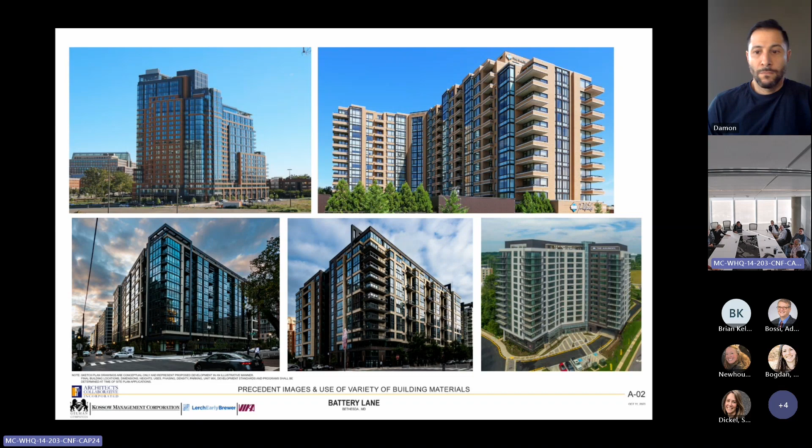Next one, please. We had comments relating to the site plan - the building footprint and its relation to various adjacencies. Within that, there were some landscape comments. Our landscape architect has also done a lot of work. He may not get a chance to go into detail today unless you have a question, and then he will help me cover that area.

Previously the driveway or drop-off area was larger, so we reduced the size of that. Hopefully it still allows reasonable circulation and a few spots to park in front of the building while you run in and get a guest pass, or for a quick delivery. It's integrated into the landscape and graphics, and we'll keep advancing that treatment in the next phase, better than what it was previously.

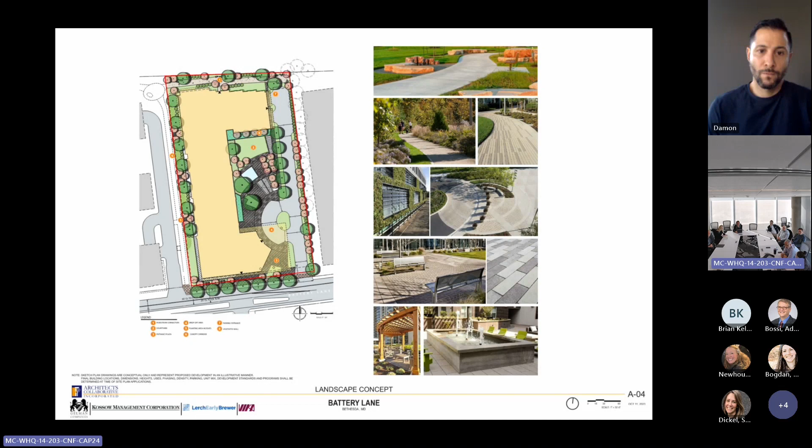Next one, please. These are some of the landscape drawings, showing what Josh and we have in mind for the plaza treatments and potential finishes and visuals. Next one, please. There's really not much to report here.

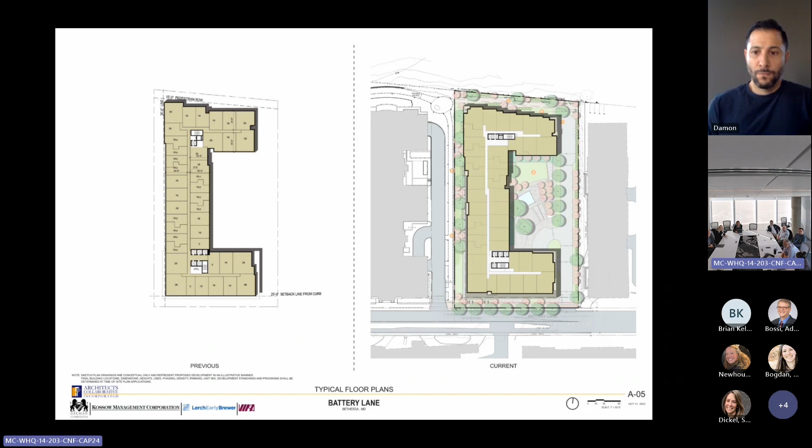There are minor internal modifications to comply with the massing and elevation changes we did. Typical floor plan - there's nothing really major to discuss.

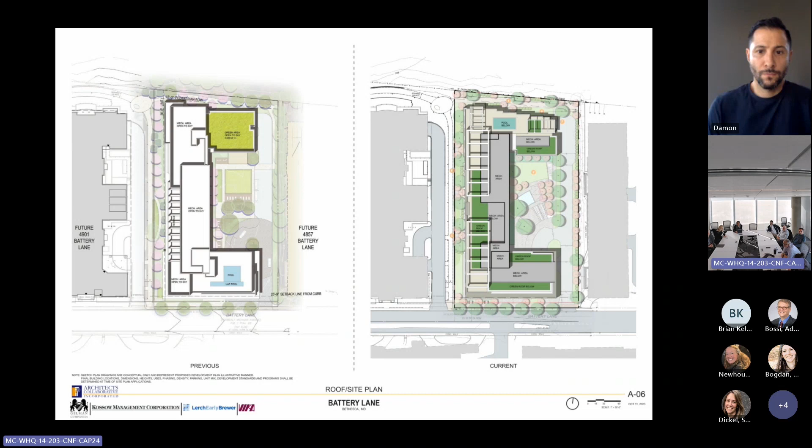The roof plan has changed quite a bit because we've made major revisions to the massing of the west elevation facing the building to our west, which was also one of the comments, and embellished the building's edge along the pedestrian path connecting north-south.

We've also relocated the pool from the battery lane side to the NIH side, which allowed us more latitude in terms of having more open recreation space on the rooftop of the building. Those are the major changes. Next one, please.

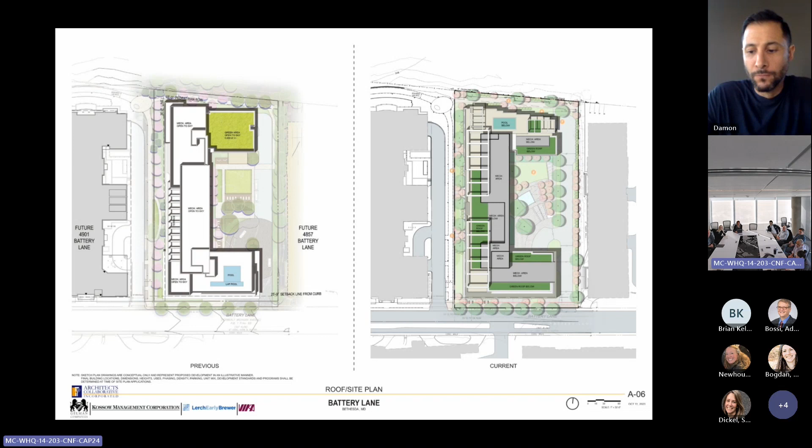It's important to keep in mind that the NIH property is wide open. We can look at a Google image if need be, but to our north there's kind of an urban jungle, meaning it has a lot of low growth and older trees that may or may not be in fantastic shape. We'll be clearing the portion within our property as much as we can, but the rest will have to be done by NIH.

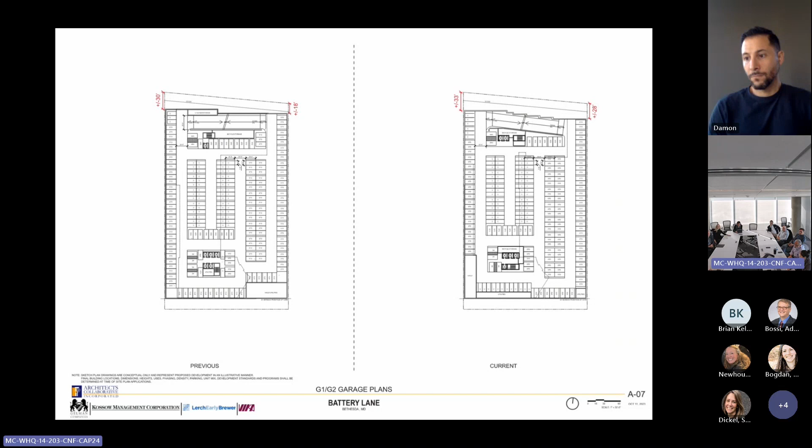And we do have some renderings for you in that area. Next one, please.

I wanted to show a comparative presentation. The left side is what was submitted or presented at the first DAP meeting, and the right side indicates the changes. For me, the most important part of this building at this point for discussion - every part is important otherwise - is the front elevation, the massing, and how we're treating the streetscape. I have more information relating to that.

We did change the setbacks. We had some re-entrant elements and we eliminated a good bit of it. There's not as much in and out above the sixth floor. The guidelines recommend that the base elements and the step-backs happen within the first 60 feet.

The adjacent buildings have a baseline at 30 feet, and that was one of the comments to us, to sort of emphasize that relationship more. I believe we did a lot of work. Hopefully you will like it and agree with us.

My intent has been to create a really nice building, something that has an edge, brings something new, and just as importantly, is buildable, and still complies with these guidelines and really is a good neighbor and a good addition to the public space.

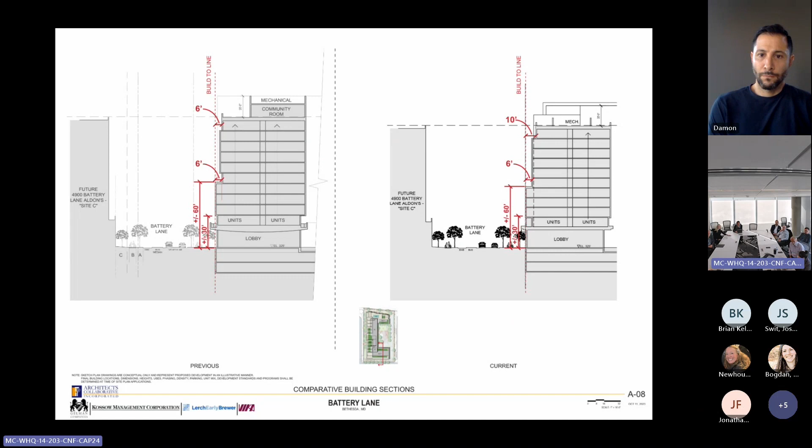Moving on, next one please. I'm not going to dwell on this too much because it's one of the requirements, but you've seen it, you have it in the package that you received. It is an important drawing, but I'm not going to dwell too much. It shows the development of the ideas and thoughts.

The building to our west has a very symmetrical expression. It has two ends and a kind of retracted middle. At a different level of understanding, we wanted to be sympathetic to that, so we have an inner element that is also symmetrical, represented by these prominent columnar pieces that culminate in the trellis at the rooftop. Then we've layered a number of different elements on it and scaling pieces to really develop a major elevation here.

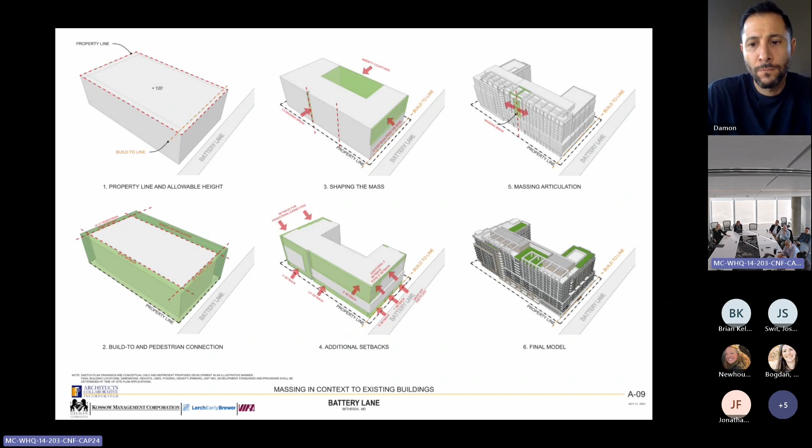Next one, please. You can see again the adjacencies and the relationships here from a bird's eye view. The previous submittal on the left, the current building design that we would like to proceed with on the right.

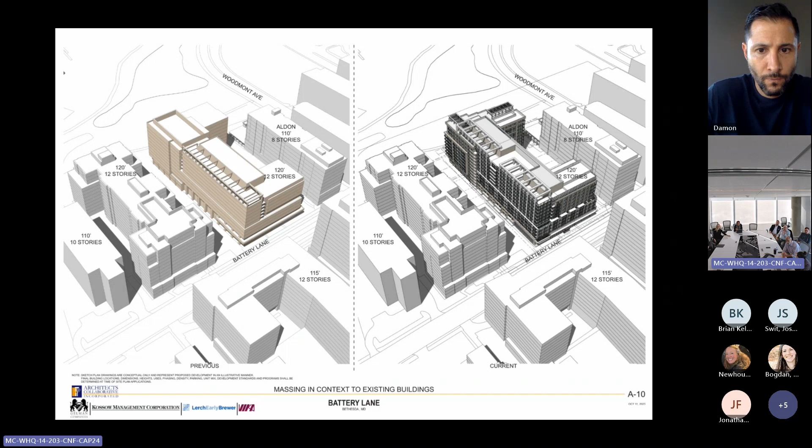You see different views of that. Can you go back just for a second? Sorry.

What's important here is that we will get back to again, is that you can see the scattered, zigzagging elevation or the sawtooth massing we presented to the NIH side.

One of the elements which may not be obvious here because it's a secondary gesture is we realized, looking at the overview, that if you're familiar with Woodmont Avenue as it curves and goes to Rockville Pike, there is a kind of prominent view looking through this back corridor. So we added an element to acknowledge that on the east side of our building—a vertical element that reaches to a rooftop, a secondary trellis. It so happens that the building to our east also steps back here, so we have a nice corridor and a secondary focal point as one is driving in that direction.

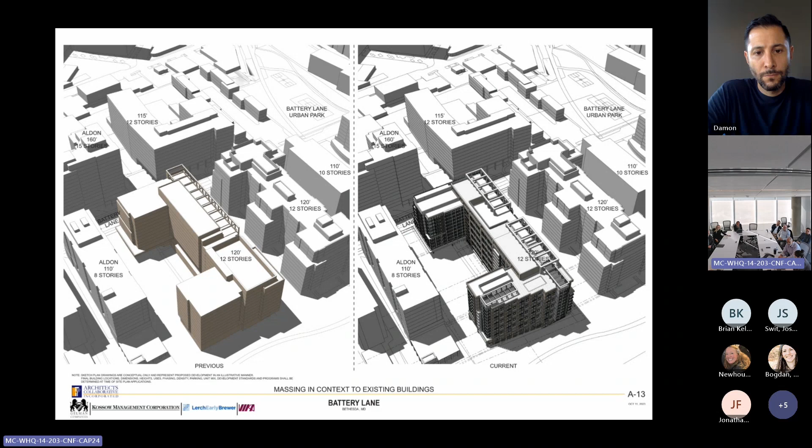It is there. So anyway, you can start seeing more what the building is going to look like and the feeling that we're trying to create.

And the importance of this drawing for me is we tried to capture the growth on the NIH side, albeit it looks a lot cleaner here than in reality. Hopefully it will be cleared out. But we do have quite a bit of space between us and NIH and the line of trees, and I believe, aside from being the northern side of the building, it will still be a pleasant path.

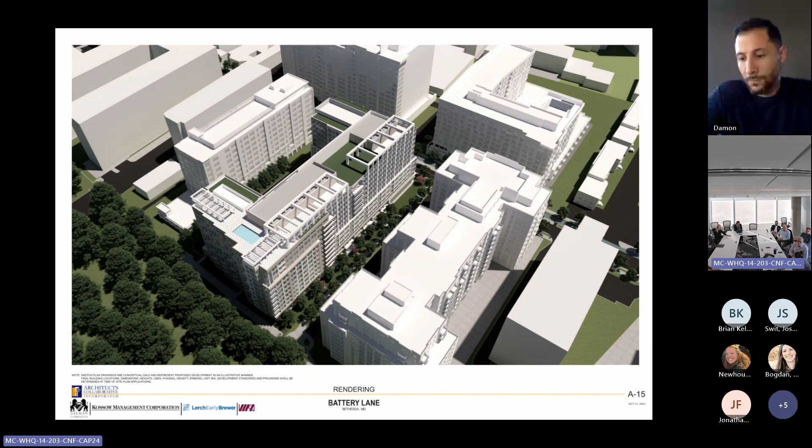Another view of the path and the space between the building and the building to our west. Next one, please.

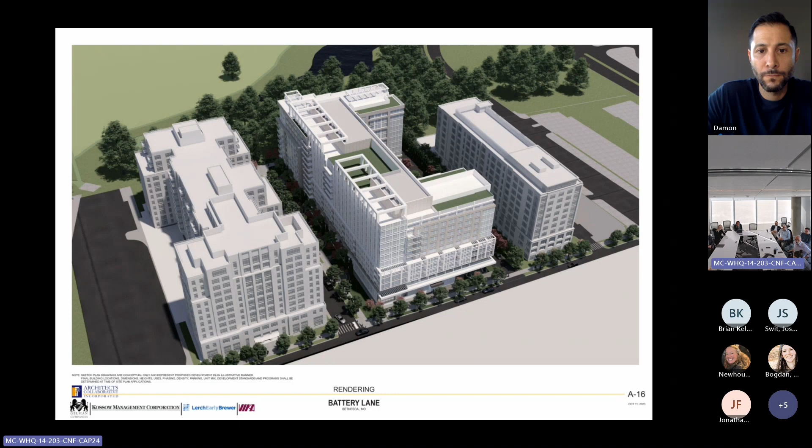This bird's eye view renders what I was describing about our western elevation treatment and intention, combining this with the rooftop, flipping the swimming pool to the northern side since on the rooftop it's really irrelevant north-south. This allowed us to join the trellis with the recreation space. I'm excited about it - it gives us an opportunity to provide good lighting and create a fantastic recreation space on the rooftop, adding to the attraction of the building.

Next one, please. So comparing the previous submittal to the current submittal, what you received in the last package, not the supplemental package - I'm trying to keep it clear. There are three things going on here, and you're only looking at the first two.

One of the issues on the front elevation, aside from the scaling element - the 30-foot baseline, 60-foot, 30-foot expression - is the southwest corner of the building where you see the trellis. Our building in the second presentation was recessed following that vertical element and what appeared to be a wall. This was a misrepresentation as well as a bit of a misunderstanding on my part, and we don't intend to do this. I'll show you what we intend to do - we've basically completely changed that corner.

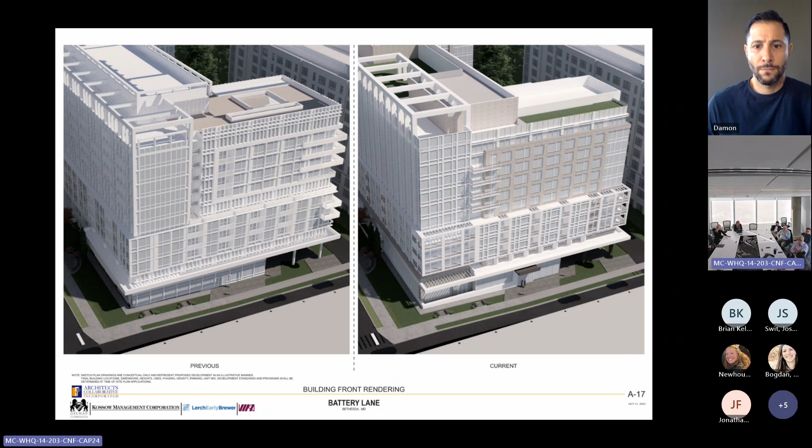There's some grading happening which is actually higher, but the site is rendered as flat, so the white wall you're seeing isn't really obstructed by the actual grading - we've clarified this in further drawings. We do agree with staff's comment and the board's comment; we don't want to present any kind of patio space or whatever. It's a misunderstanding, my mistake. Next one, please.

So you can see the changes from the previous to the new one. We've articulated a lot more on this elevation. It was also suggested that we resolve this elevation - there was too much repetition. We agreed, but that was the length and extent of the development at the time. Hope you agree, we brought more richness to the side. These colors are more abstract, we're dealing with lighter color, we're still working with modeling. Obviously when the reality of the materials are brought in, the next level of study, it will be an even more compelling rendering and building in reality, hopefully. Next one, please.

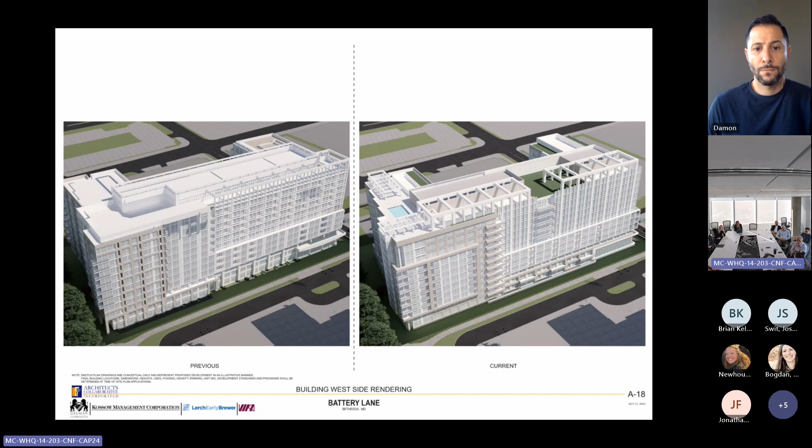I wanted to talk about this elevation that I mentioned a number of times. What's important is on the ground plane, we have widened the path by about 10 feet on the eastern side, another 3 feet on the western corner, widened the path, and also cut the building back parallel to the property line. We've introduced more residential elements and a bit more dynamic geometry rather than surface architecture. And then we've created a 30-foot base here again, which was suggested by staff and we agreed with that, so the building base is more continuous and more prominent on the side as well. Next one, please.

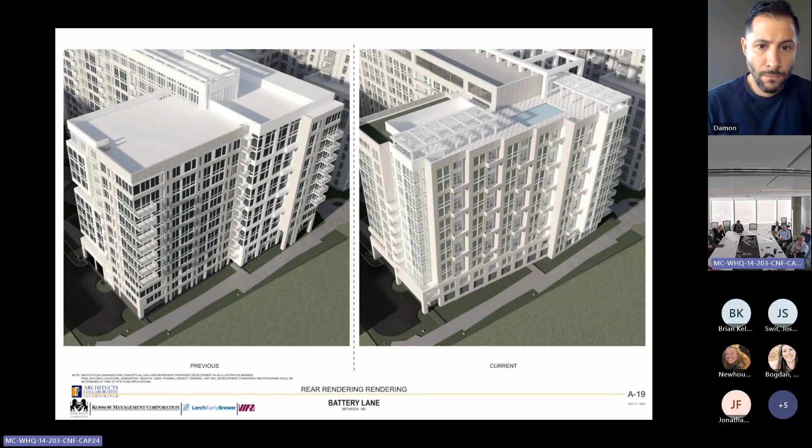This is a comparison now with the second submittal, which you just saw in the previous drawing, versus where I am today. I'm going to stand up so I can point to certain things here. We had a very prominent cantilever, which we felt was the essence of this building concept, and the boldness - for us at least, a new architectural treatment. I certainly don't want to lose that, but there were some things interfering, which was there's still an overweight, too prominent a canopy, which drew way too much attention to that portion of the building and stopped the eye.

So listening to the recommendations - by the way, this is just a reference line so you can see the height relationship with the adjacent buildings, approximately 30 feet, 3 stories roughly. I'm assuming they have a 2-story space - we have a completely 2-story space, which is our lobby entrance, with some seating areas within that lobby.

So in order to bring more prominence to this line, we widened the span away from this thinner band, and then we added an additional line almost in a classical treatment to bring a little bit more interest and importance. We eliminated that heavy canopy at this level.

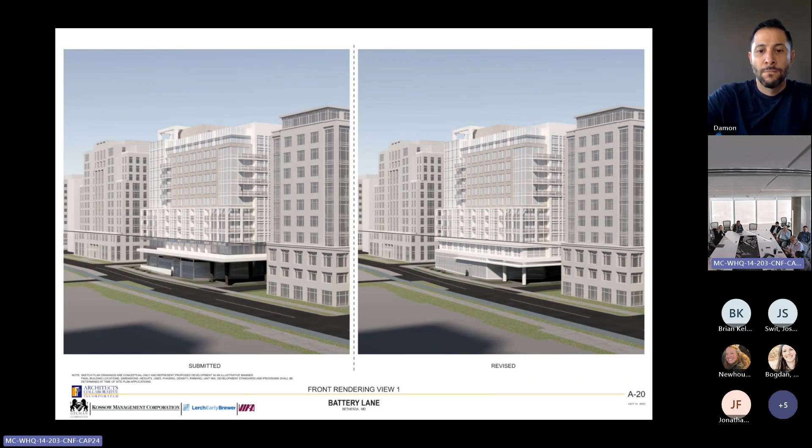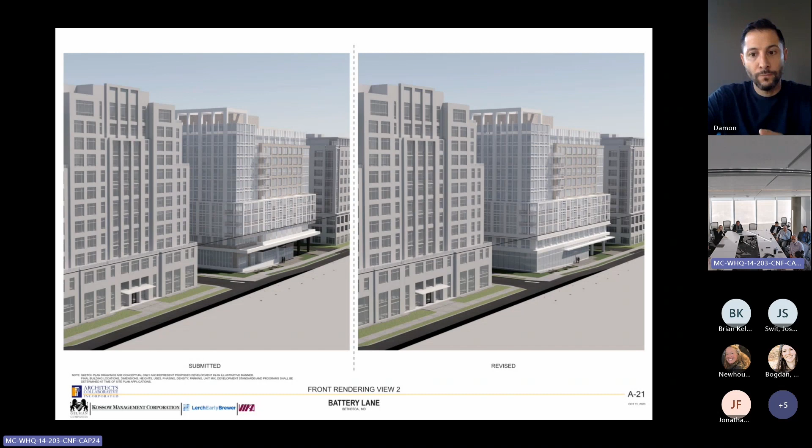Next one, please. This is a view of the same things I described, looking east. Again, the black line is for reference only. Just more context you can see.

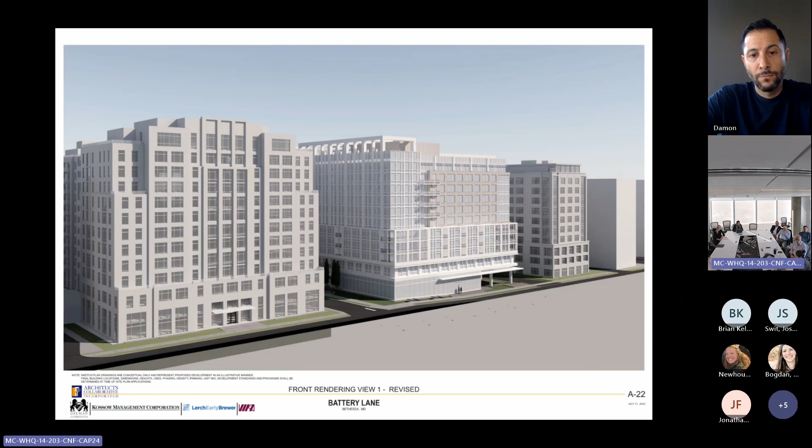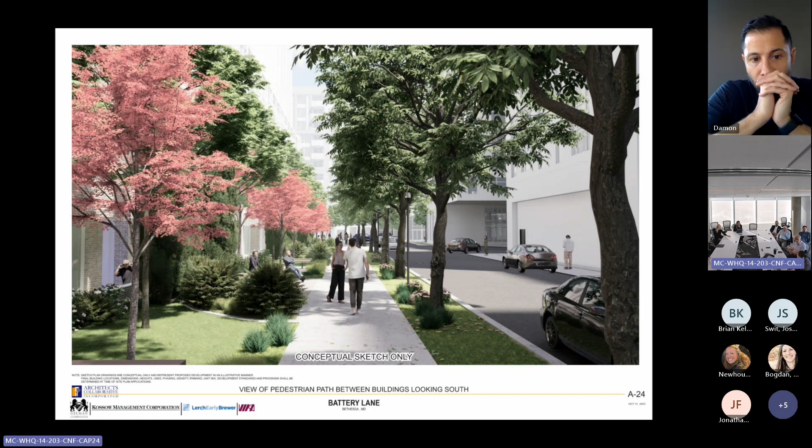This is one of the sketches and renderings we presented. This is the space on the west, the path on the western side of the building, and we're on the left. Obviously that's where the colored trees are because we control that, and Josh can address that path. He's done a lot of work here, embellished the landscaping, and I think it's a pretty realistic, spatial space. Obviously the trees and colors are some other abstractions.

Just have one question: in the supplemental that you all shared, there was a north-south connection that looked different from this view. Yeah, it's the opposite direction, looking the opposite way. I'm just going to show this—I think it shows the north-south connection in a better light.

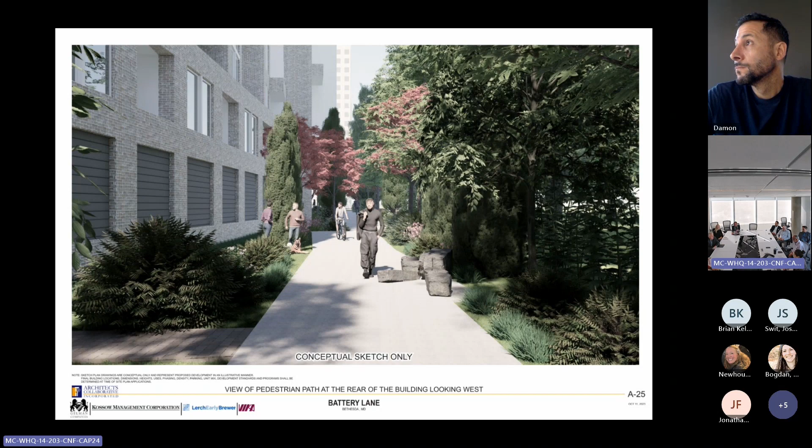Also, I'm curious about the supplement you submitted later—can we talk about that now as well? You haven't shown it yet, have you? No, because I was showing you the most advanced one. Frankly, I didn't want to take up too much time. But we have the original DAP presentation, the supplemental presentation, and then this comparative presentation. So what would you like to see? The supplement, okay.

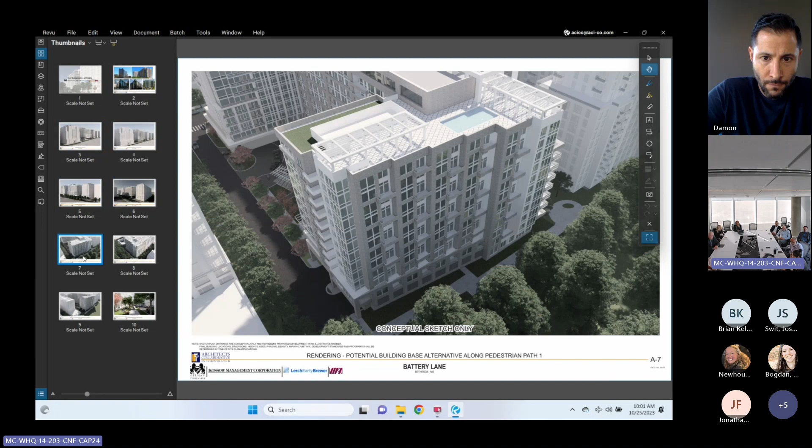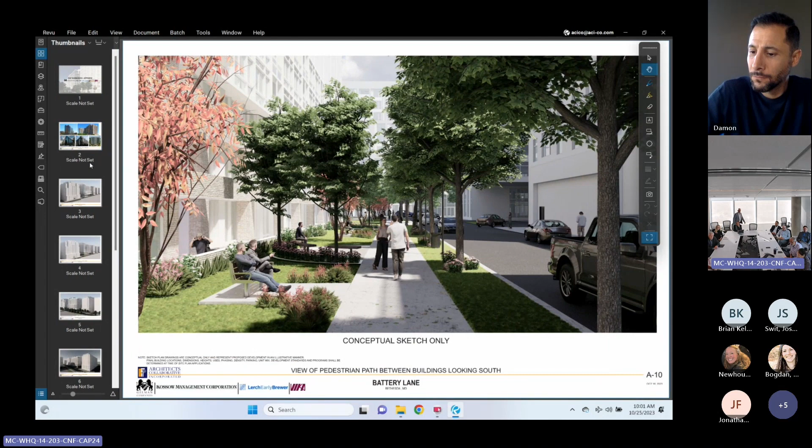So is this the package that you want to see? Yeah, you can go through it quickly. That's the supplemental. Jayu is moving through it very quickly, but should we run back and forth or? Street view, the battery lane view. This one?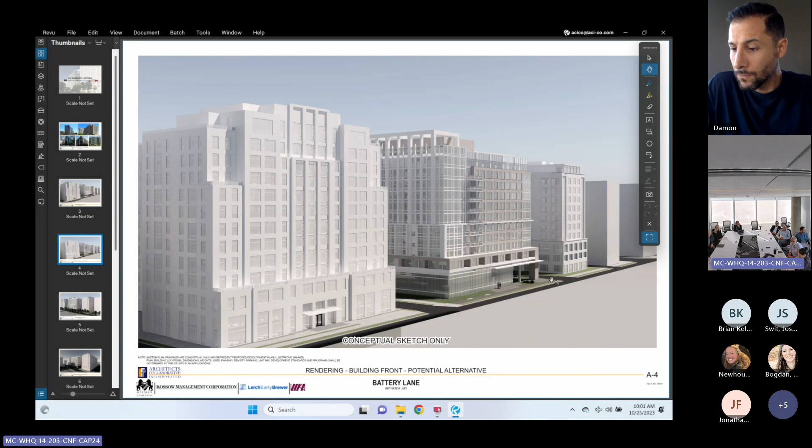Is there other views? Yes. There's glare on the screen right now. Oh, yeah, I thought it was just me. We did this very quickly. We had last minute comments and we tried so hard to respond to them.

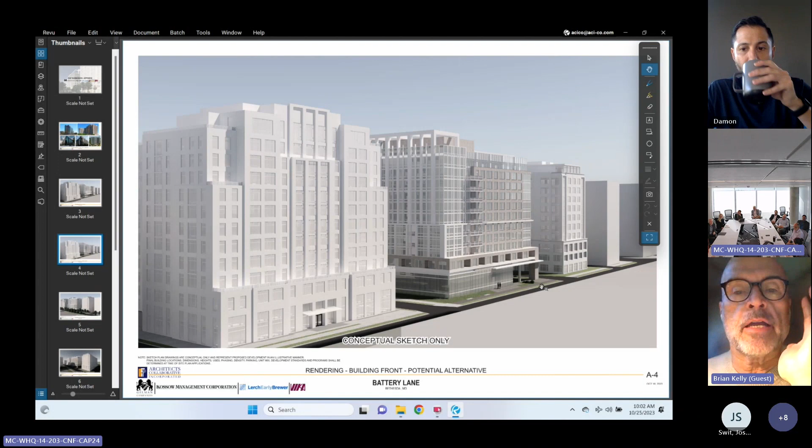This was a quick attempt on my part to show you—with all these different documents, which of these are we being asked to assess? Because I see some that say revise, some say potential alternative. Good question, I'm confused as to which one is on the table. The last one I presented, the one I finished just now.

So not this one we're looking at right now? No, this was a supplemental package we did very quickly. I'm finding it—this, right. So we should ignore the supplemental package? Yeah, this aspect of it. There are a lot of other drawings in there.

So what was the intent of submitting these images? We responded very quickly—I really wanted to show what happens if I eliminate the front cantilever and try a three-story base. It basically deleted the architectural concept of the building. If you can quickly click back—so this was just an exercise to show what would happen, not necessarily what you're asking for. I didn't have a chance to do this work properly, that's what I'm saying.

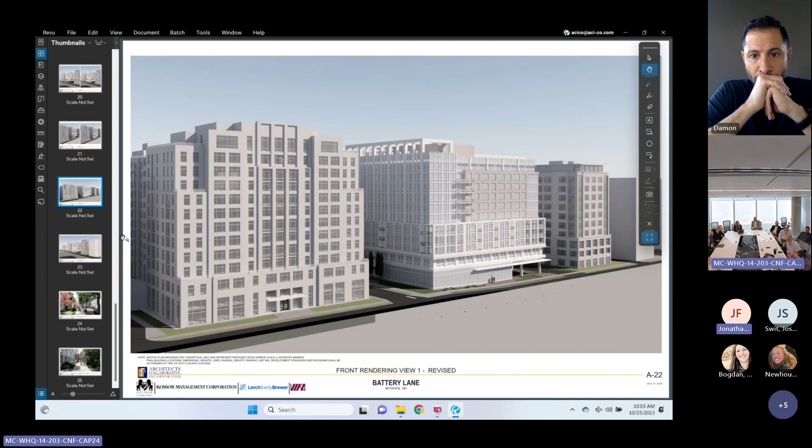Could you make it clear which is your preferred alternative that you'd like our comment on? This is the one you're looking at. You can try another view, this view—we have a number of them.

This is the material in the presentation.

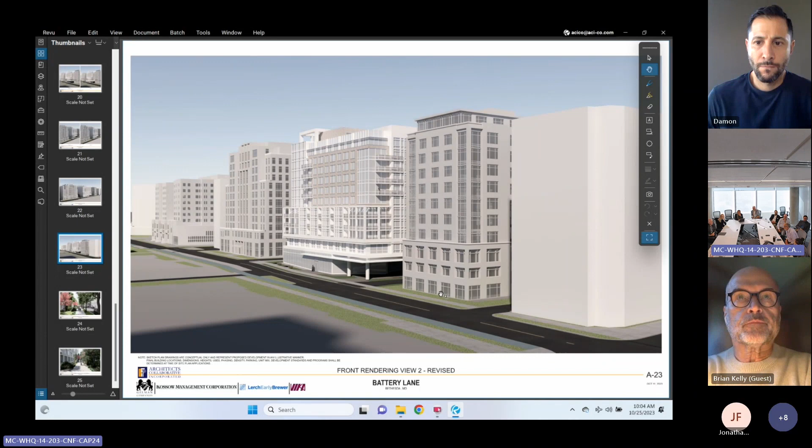My reaction to this one was the base seems much too high. Your supplemental one began an attempt to bring it down, which felt like a better move to me, but still needed refinement. That was my reaction. I hear you, I appreciate that, but it just needs a lot of work.

I thought about it quite a bit between then and now. I'm trying to hang on to this architectural concept, as I mentioned to you, of this building projection that is different proportions, yet it's still within the 60 feet baseline, etc.

I guess you have two neighbors that have established this 30-foot high kind of base, but they are not yet built. I assume they're going to be built, aren't they? I have no idea, well, they've been entitled. The building to the west does have site plan approval, the building to the east does not, so that one is still sketch plan. It's part of Battery District.

One of the merits here, I think, is the top of the building. I think you've devised a way for the building massing to meet the sky gracefully.

More important to me from an urbanistic standpoint, particularly a street like Battery Lane, is how the building meets the ground. I sort of feel like somebody's hiked the trousers up so that the belt line is someplace around just below the chest, a little higher than it really needs to be. The 30-foot height of the adjacent building seems to me to be a datum that you'd want to somehow respect, and it seems to be kind of confused by that.

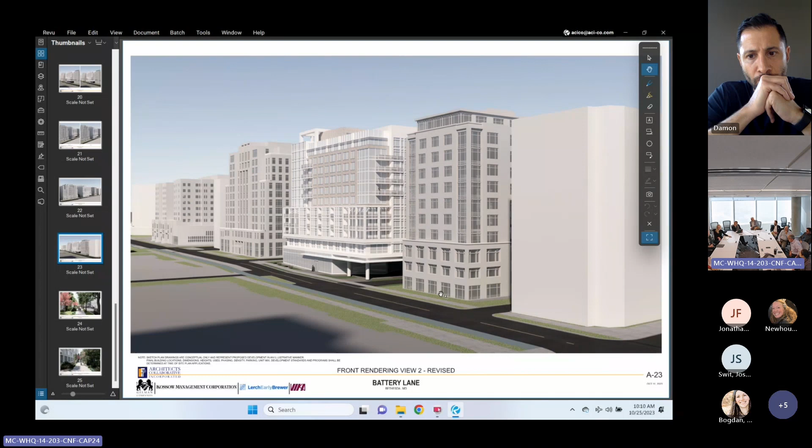Yeah, you added definitely a lot more detail to the facade, so it's definitely more refined than before.

I'm the same with you - I'm with you, Rod, in terms of the view to the courtyard at the street level, because of the two buildings. This one, I'm okay with that space being open.

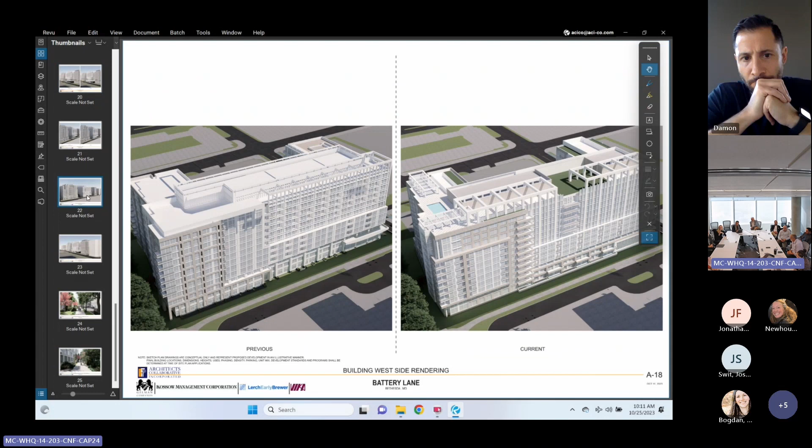Thank you. I was going to use it as an opportunity to bring some art to that space as well. It will definitely need something, because I can just see this nine months out of the year being a dead zone where people aren't going to want to be there because there's going to be cold breezes going through. Yes, they will have a view to a courtyard, but the activity on the street I think is not going to be very active. So I think it's going to need something in there to activate it - public art, something.

The other thing, and I apologize that I was late - in the previous drawings we saw, I don't remember if it was this meeting or a previous one, or if we saw it as staff - I think one of the issues was that the base was starting to look like a distinct base with the canopy, then you had this very recessed floor, and then you had kind of this three-story wide belt above it.

So instead of a base, middle, top, you sort of had base one, then belt one, then middle, then top - you almost turned it into four pieces. That was one comment. And then there was also a comment about a retaining wall that kind of appeared that we were concerned about - I talked about that, you may have missed that portion.

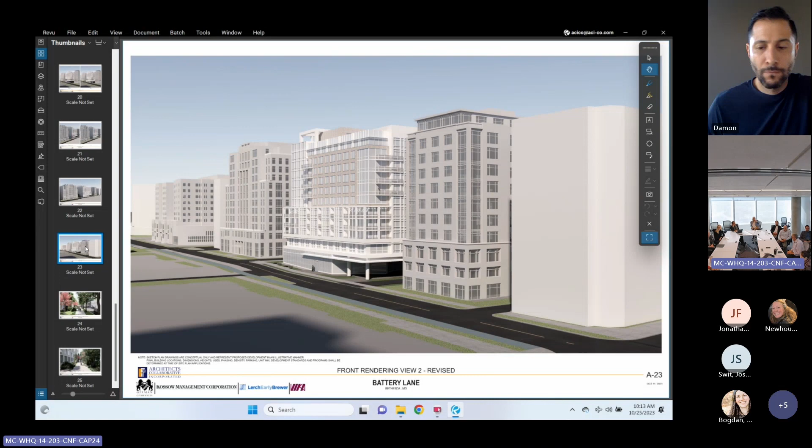I think there's obviously a lot of detail that was put into that belt, the fenestration, the structure and everything else. I think it's quite elegant, but we were hoping for some way of weaving that into the base so that it looked woven into the lower parts, not necessarily all one design.

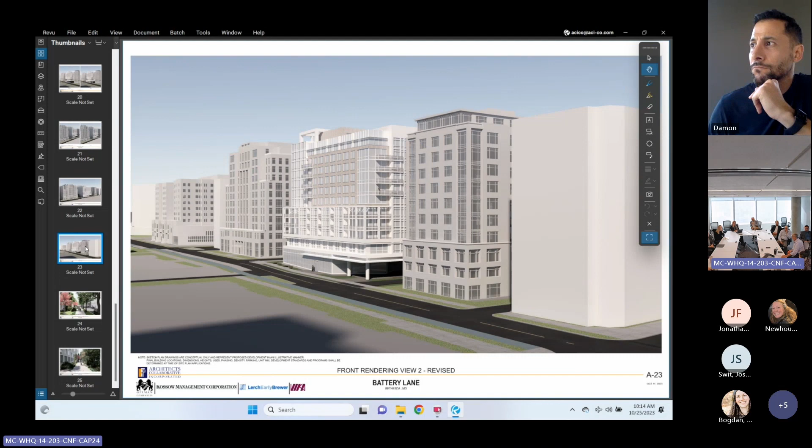Thank you for that, I think you put it very well. I read that comment a number of times, over and over again, and I understood it. If I follow these instructions, get rid of the belt aspect, then the cantilever concept disappears. They cannot exist in the same space.

So that's why I said this is what happens - you end up with a 3-story base. Yes, it will shake hands with the building to the east and west much better, but I lose what I think is an exciting architectural concept, which in my view is still valid, but I respect every opinion here. What I would like to do, if it fits the whole group, is you started saying something and I was headed in the same direction, except it requires more time.

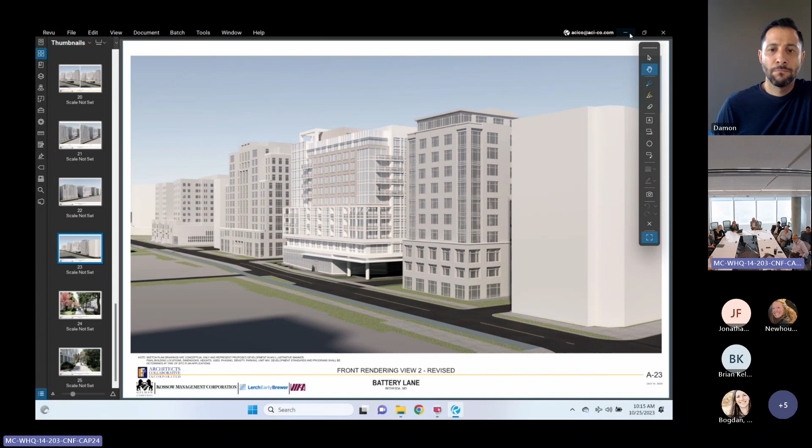Jayu, I don't know if you can dig up the perspective from the supplemental, the building base drawing, the 3-story base.

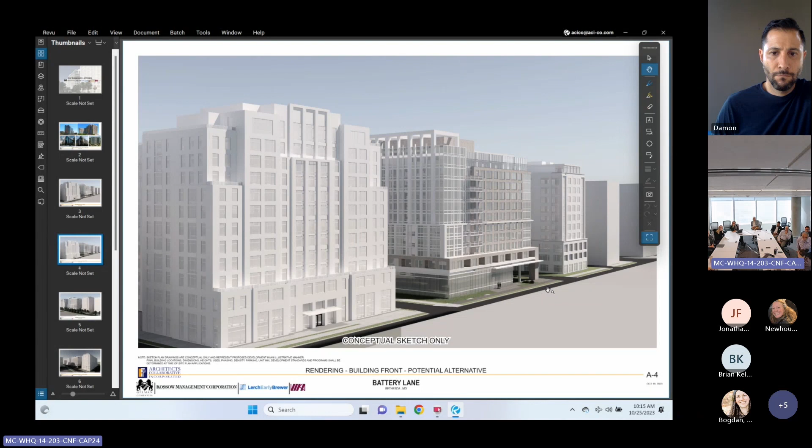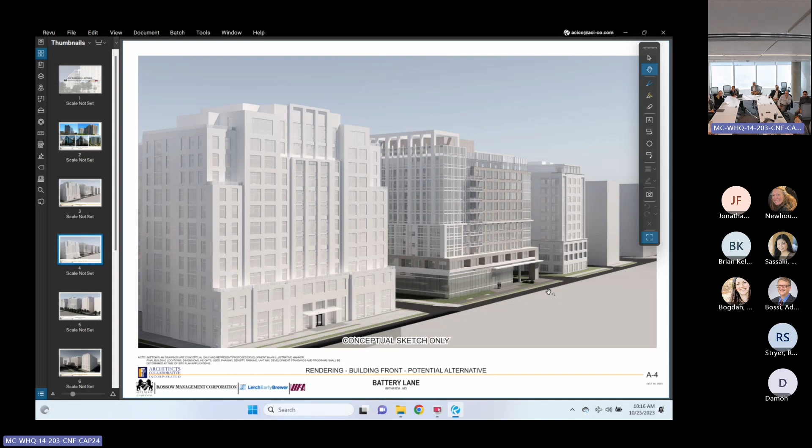What I would like to do, and I'm going to keep it - architecture is all resolved in words until you get to the desk and nothing works, right? So I'm trying to retain this 3-story overhang displayed on the west side. I'm going to try to bring this somewhere around here so I can suggest the beginning of this and take the eye in towards the west elevation, then see if I can develop a base at about the same height.

I just wasn't fond of what's going on in here. It just became very ordinary, and this became very plainer. So I lost a lot of the excitement. I re-reviewed this and then reacted to it, so I showed up with the renderings you looked at today. Those were my reactions, and this is a remnant from an old model.

So if you agree, I would like to go to the site plan with that understanding and keep working on the building.

Well, let's call it your belt. I think pulling the belt around onto Battery Lane and maybe terminating it where the balconies are helps reinforce what you're doing with the top. That's what I'm trying to do - it gets more cohesive because of that.

But I didn't have enough time to resolve it here, and it just became kind of sloppy. And I guess it's your second floor, the top of the base. Yeah, I agree, it's just way too heavy, it's not integrated. Perhaps it needs to be all glass or all one material, whatever it is. I mean, I didn't have a chance to do it.

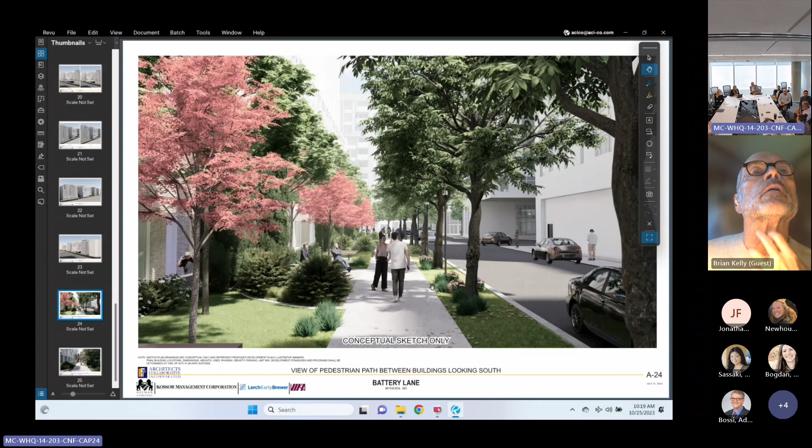It's not two views, it's one and one. There was an original view taken from higher up in the first submittal package. There is a slightly raised view looking into that space. Perhaps that's what you're talking about. Give me a second here. Oh, no, I think what you had was what I was talking about.

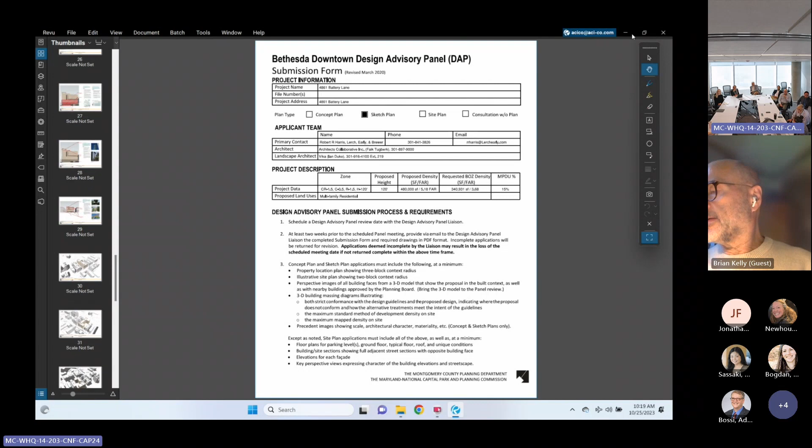Oh, okay, the supplemental package, there's a view that makes that space look really a little bit wider and has these sort of public-to-private delineation. In the views we saw today, I just want to make sure this design is what you're proposing in what you shared today, Josh? Correct. Yeah.

The idea is to build on the proposed path for the western site, to have this rhythm of small spaces along it, and then define with plantings, and sometimes some seat walls or furnishings, a buffer to the more private realm that's along the building that may have terraces coming out. We are taking up about 3 feet of grade from that level at our northern property line, so it'll change a little bit in its expression, but it'll have those features in a rhythm along there.

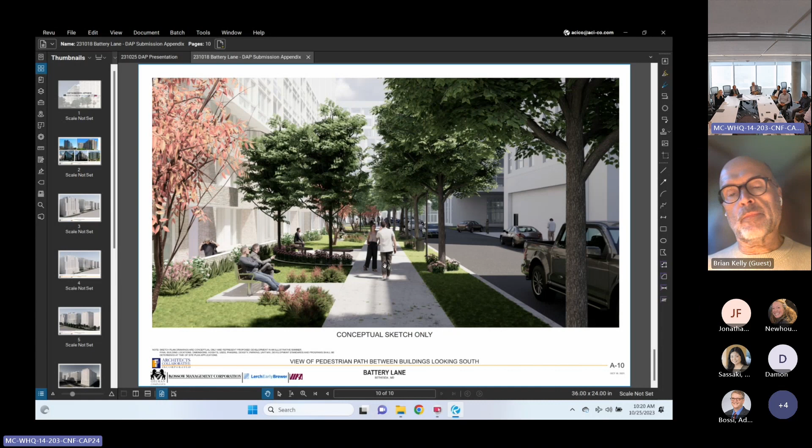I think Jonathan had something to share as well. I have actually a few, I don't want to confuse matters by talking about the architecture, but on open space, I have some comments.

While this slide is up, we can talk about this space. I know you've talked about the difficulty, or even impossibility, of having entrances into ground floor units from this side. If you're going to show this sketch and you don't show the grading issues that you say prevent that, I don't think this sketch is helpful. You've told me it's not flat, but I hear that, I don't see it. And I think the way it's rendered indicates that it's supposed to be a public space. I think this is a very unlikely public space.

If it were individual gardens for ground floor units, I could see it much more, I could understand that better. But as public space, it just seems unlikely to be occupied. It's way off the street, there's no reason for anybody to go there. So that's one thing. And if you really can't do the entrances from this walkway, then please prove it to me.

That's one thing. Can we talk about the north side of the building, please? There was a sketch of the north. What was the last slide? Last slide. Here, yeah, there we go.

If the view into NIH is unlikely to change because it's an institution and is, how should we say, pleasant and open, it seems to me that the density of the planting ought to be against the building where the louvers are, and the views should be opened up into NIH rather than the other way around.

Sure, I agree with your comment, we will put more landscaping against the building. It's not shown here, we had markups, just didn't have time to turn it into this presentation. No criticism intended. No problem, I think that would be a better approach. The more important comment is, and I tried to cover that in my presentation, we can't really impact the NIH property, and so we'll clear the area that is within our property lines.

But unless a negotiation is made with NIH and they can go and sort of do the clearing of the undergrowth and see if there are any trees worth saving, which is not my forte, Josh can help with that, then we can open the view.

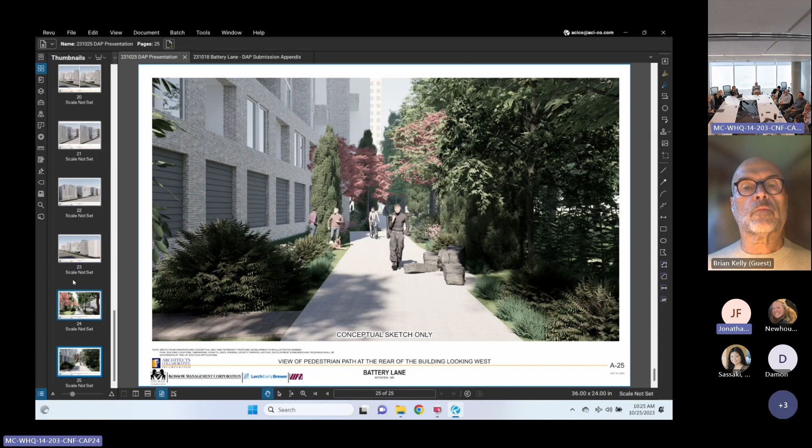And then the last thing is about the canopy and view into the site from Battery Lane. You've talked about how inviting that is, but personally, I don't believe it, and we don't see any imagery that would convince me. If you think that's important, to see underneath the canopy, past the drop off and into the private park for the building, we're going to have to see that. I'm very skeptical.

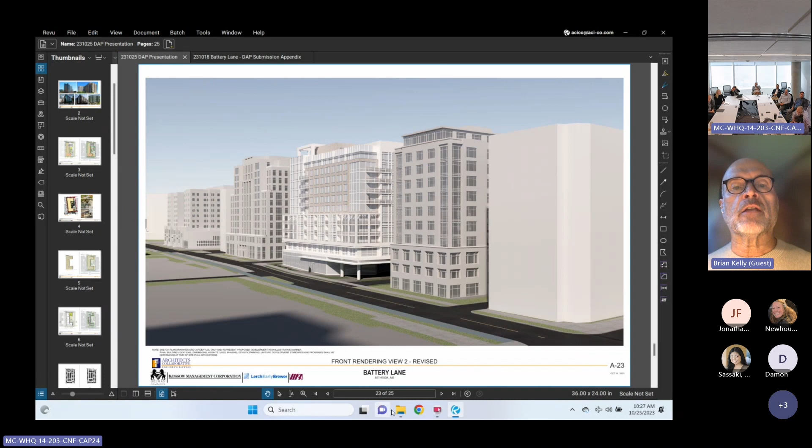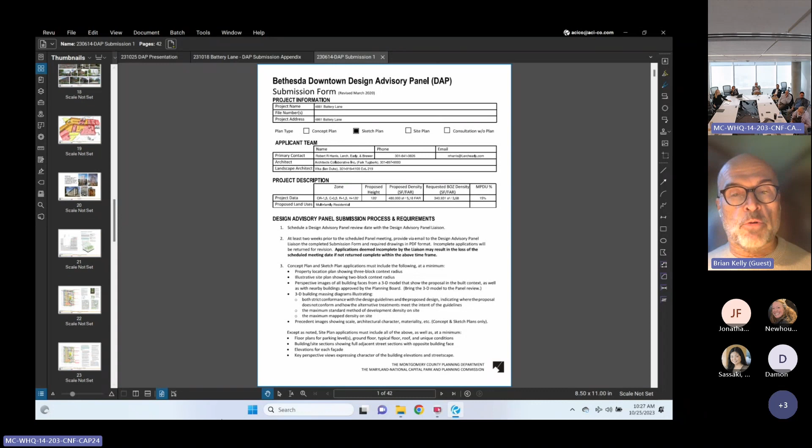Eye-level perspectives of how the building meets the ground, but not rendered like the two perspectives we were just looking at, rendered so that we can understand the architecture, and that the greenery is transparent enough so that we can understand the play between the supporting vegetation and the architecture. Right now, both of the perspectives we saw, the greenery is a conceptual sketch, but it sort of masks what the architectural intent is.

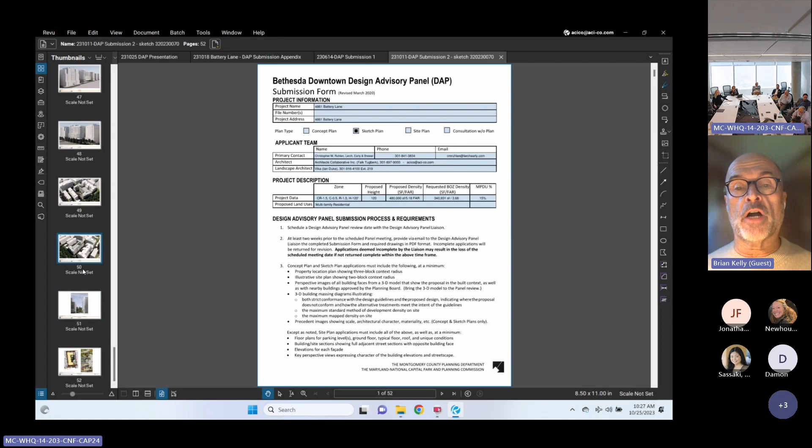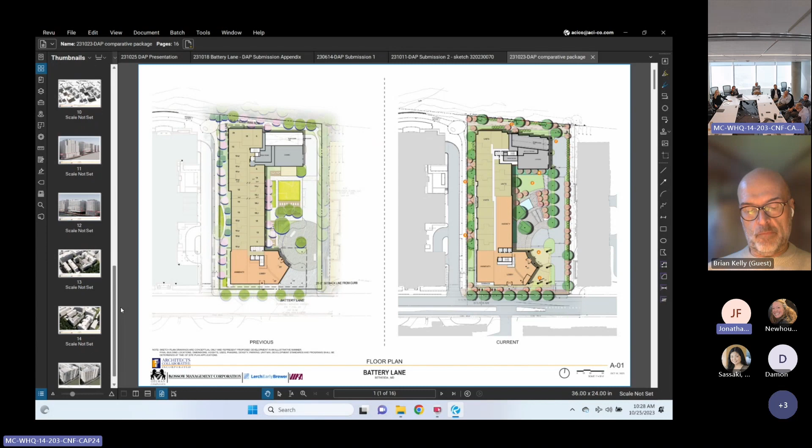And making that visible and inviting to the public isn't the point. It might be more inviting to the public if the lobby and other lobby improvements possibly invited the public in. That would be more of a public benefit than a view into a park that they're not supposed to occupy.

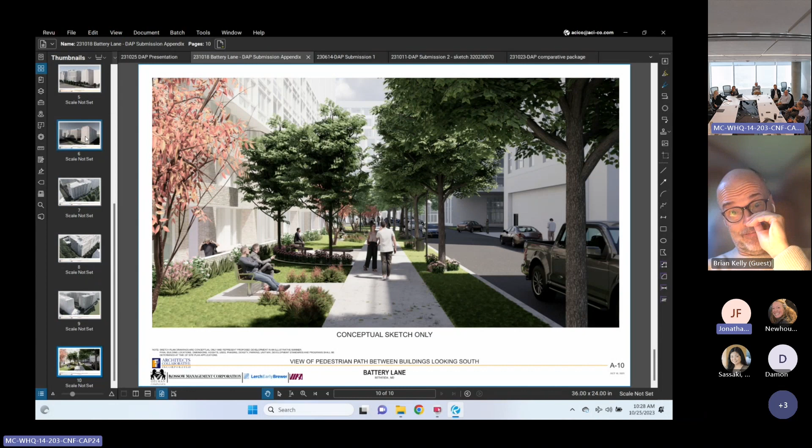So if that's going to be really wonderful, please let me know - trying to find it, but I respect the comment, I'm not in agreement with it. Again, it is a very pleasant green space to which you have a view, and it will present a relief along the street. Even if you were downtown, every now and then a break would be helpful.

I see a lot of excitement, frankly, under that canopy. It's an opportunity to light up, and the building lobby is all glass - the whole facade is glass at the first two floors, totally transparent, daytime or nighttime specifically. I would also like to have that street connection if you're in the plaza and use it. There is no sign there that says do not enter.

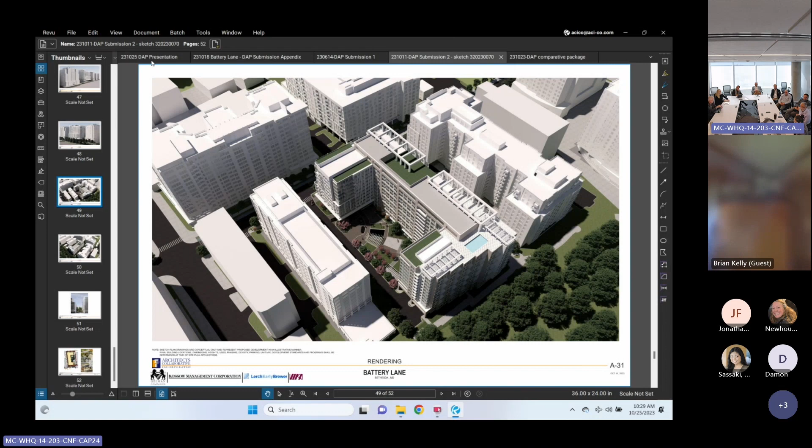If I can just add, we don't intend to leave that a vacant area. We intend to do something with it, whether it's public art or doing something with the columns that are open, making those more sculptural or growing greenery on them. There will be something done to make that area exciting. We had a rendering submitted for the first presentation.

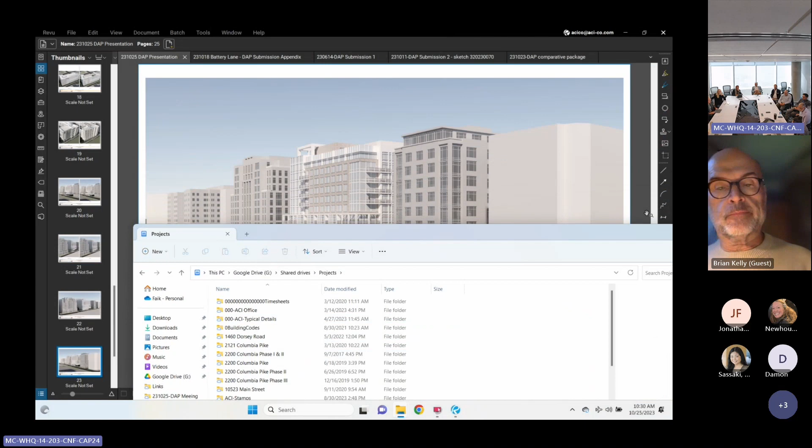We're not finding it from street level. Okay, we're not able to find it. Well, we'll look forward to seeing it later on. Thank you. I don't think I can offer a firm endorsement of this strategy without having seen it.

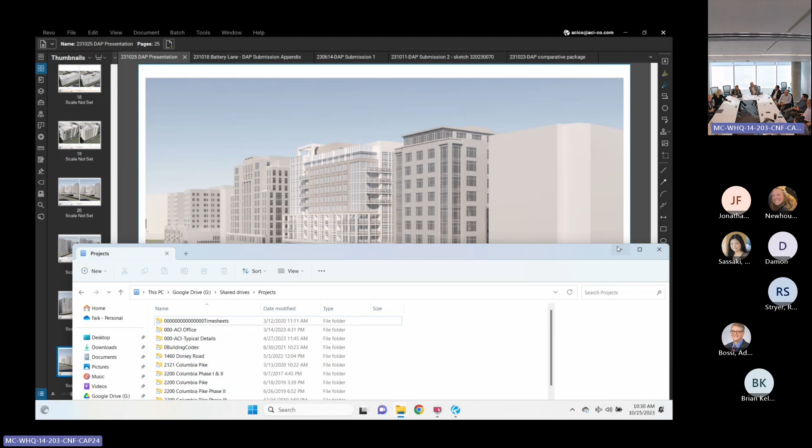It'll also be good to see how the drive-through interacts with that space, because even beyond that void in the building, there's what, 30+ feet of a view corridor into this because of the existence of the driveway. So I think seeing both those things together might help the conversation.

Isn't this rather a level of detail beyond conceptual? I think that's fine. Also, we are at sketch plan, but I think the conversation we're trying to dwindle down to is whether the DAP has enough information now to do the straw vote to move it onto site plan. What I'm hearing are things they'd like to see at site. Please correct me if I'm wrong. But Jonathan, was that what you were intending?

Well, the issue for me is that if they move ahead to site plan, and at that point we find out that the undercut of the building isn't something we think is good, then the poor guy is advancing down the road weeks or months and has to change things at that point. Whatever the panel thinks is the best way to proceed, but I'm just concerned we find out we don't have this information yet.

As a sketch plan, we're talking about massing. This is a massing issue at the ground floor. This is a massing issue with the whole base of this building, and so I think it is part of sketch.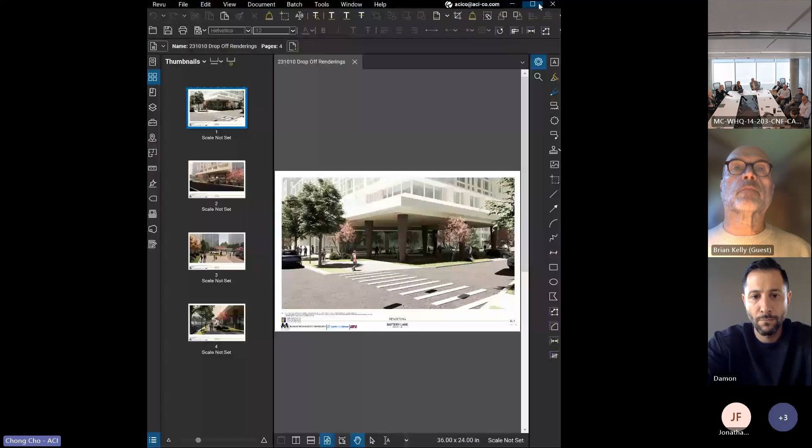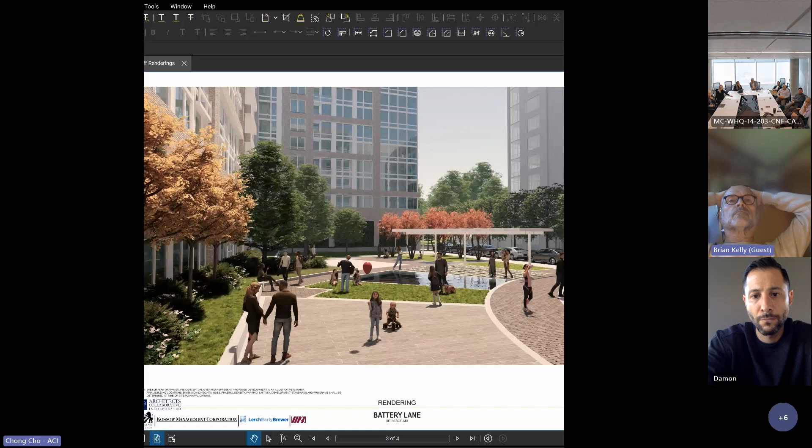So this is the older model, but it's looking underneath that canopy, looking into the space. Can you guys see my screen? Yes. Here's another view from inside, looking out into Battery Lane. Here is the view looking into the courtyard space, and here is the street view on Battery Lane.

Thank you, John. But this was not submitted. Well, we did not submit these drawings—first presented now.

Just a quick collegial statement: it would be very helpful, because I was confused, as we jumped in and out of several different PowerPoints. It would help to have a single document next time that both looks backward and forward, rather than jumping back and forth—I was thoroughly confused by the supplemental material moving between documents.

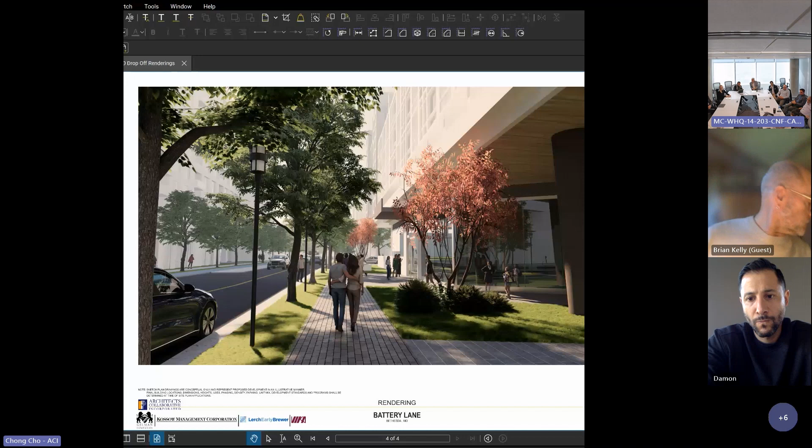So if I could make a statement, because I sit in the same professional world as you do, and I know it's 3 months and 2 were last year—there's a lot of burn that goes into getting to those points. What I'm hearing from my fellow panel members is the space needs development, but as far as I'm concerned, it can wait until the next phase. That's my personal view. I agree.

Damon, can I get your thoughts? Yeah, I mean, I can go both ways here. Clearly there's some consternation on the panel's part here.

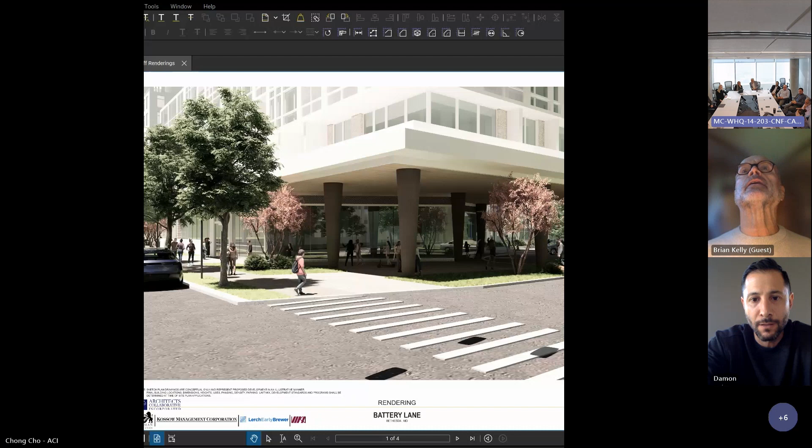Clearly there's some differing opinions on the panel. What I would suggest to the development team is to come back at site plan with the 2 different options that we're hearing. But at the site plan level, that's challenging to do. So that's a question for the development team, whether that's the direction they want to go in.

If not, I would suggest getting this resolved, even though to come back on a concept level plan 3 times is pretty unusual. Yeah, it does sound like something that needs to get resolved here.

My own personal opinion is I kind of like this corridor, it's a beautiful plaza area off the street that's being designed or rendered here. So I personally like it, but I could really see it going either way. I think at the end of the day, it's going to be a beautiful building no matter what. This has gotten a little bit lost, but I would congratulate the development team here. It is a nice looking building, but there's just this one element that needs to get resolved. Those are my thoughts, I don't know if it's helpful.

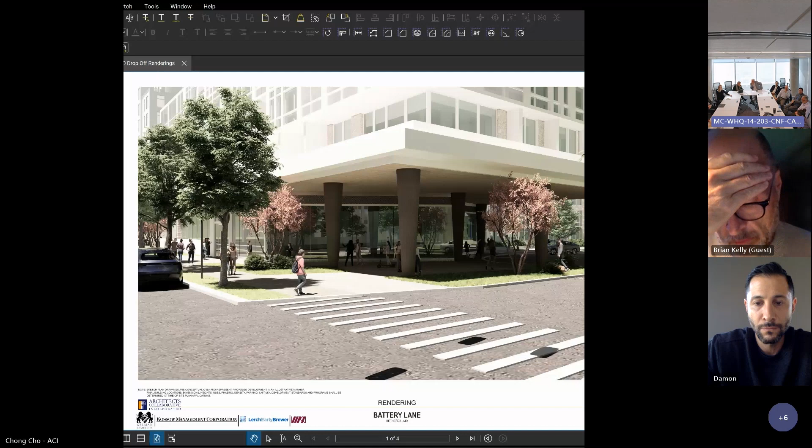Yeah, thank you for those comments. What I'm committing to is to resolve the base, which I think is the biggest issue, and head in the direction of the 3-story base and somehow resolve the architecture above it through more work on our part. But I think the second comment, this opening to the courtyard, is sort of being debated. I would like to retain that and show that we've done that successfully at the site plan.

If I may add, Damon, I appreciate those comments. This is Chris Rulin. I think that some of the answers to this will reveal themselves as we get into the site plan, when some of the details are known about how the art would work in that space. At the site plan stage, we'll only have more information to answer some of the questions being asked. So our team would be fine taking the comments on board and knowing that this is an issue to resolve, to revisit again when we get into that stage. But I think we would only have more information at that point to help make the case.

So to get this to a close, I hear 3 of the panel members saying that this is okay to move on to site. And I have the comments from Brian and Jonathan that there's still more information needed, particularly in this space, the ground level images updated. How is it going to be activated? Will there be public art? What's going to be in here? What is the view going to be from the street? So with all of these comments taken in mind, if the straw vote is 3-2, we can move this on to site plan with those things being addressed then. And that is the base issue. Does the DAP want to see an alternative design at site plan with this?